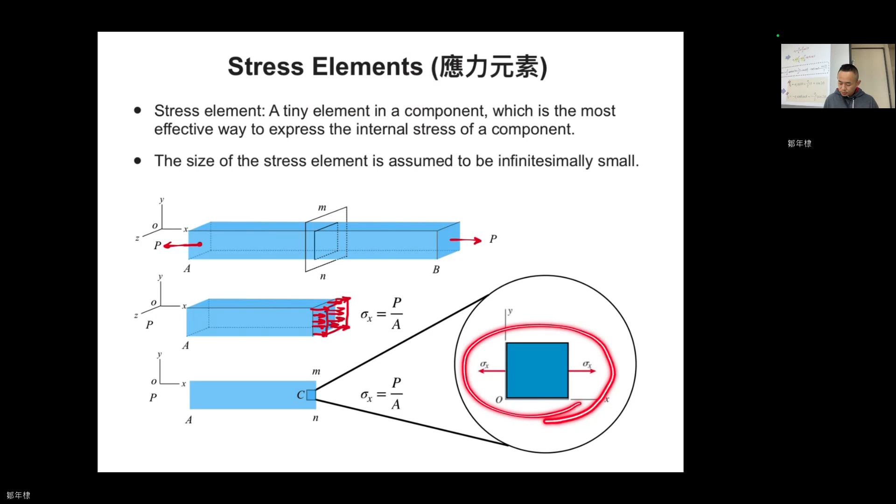Last week we talked about the stress element, which is a really important concept. If you have a loading, your loading will cause the material point in this material to have a stress element. Each material point has a stress, and the material point can be referred to as a stress element, and the element should look like a cube. The reason we use a cube is because the cubic surfaces can be regarded as orientations, and each orientation represents a component of the stress. So at each point, there is one single stress status, but if you choose a different coordinate or orientation of the material, you can see different components of that stress. So if you choose this direction... In this page we introduce how to determine the component of the stress and the relationship between sigma x, sigma theta, and tau theta. The theta is the orientation you choose, and on that surface you may have the normal stress and shear stress.

Also, I would like to emphasize one thing: in mechanics of materials, in this course, 90% of the proofs of problems follow a similar procedure like this. You can use stress times the area to become force, and then if you have force, you can either do force balance or determine the corresponding stress.

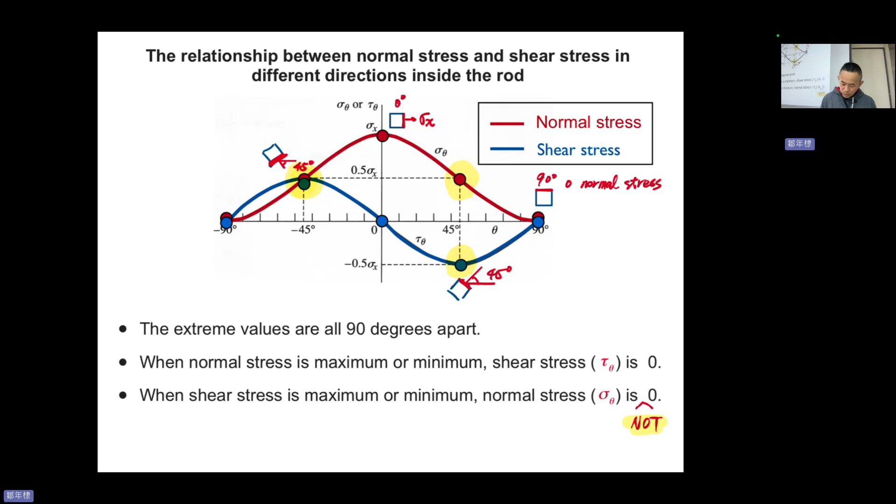Right, if you can accept that, I will give you a first example and then you will understand what I'm talking about. Let's continue. This is kind of typical.

And this is material subject to compression, P equal to 90 kN, area is blah blah blah blah, P equal to 90 kN, and it wants us to find sigma theta, tau theta at theta equal to 25 degrees.

It also asks us to complete the state of stress. What does that mean? Just plot the orientation of the stress element and all the stress on it. The answer should look like the value here and a figure here. So when you write the problem in the quiz, you're going to write down the value and plot the stress element.

Now let's take a look. Firstly, what is sigma x? Because the formula must need sigma x first, right? Sigma x equal to P divided by A, where A is 1.2 times 10 to minus 3, in MKS units. This is really important, please put your emphasis on this. This is 90 times 10 to the 3.

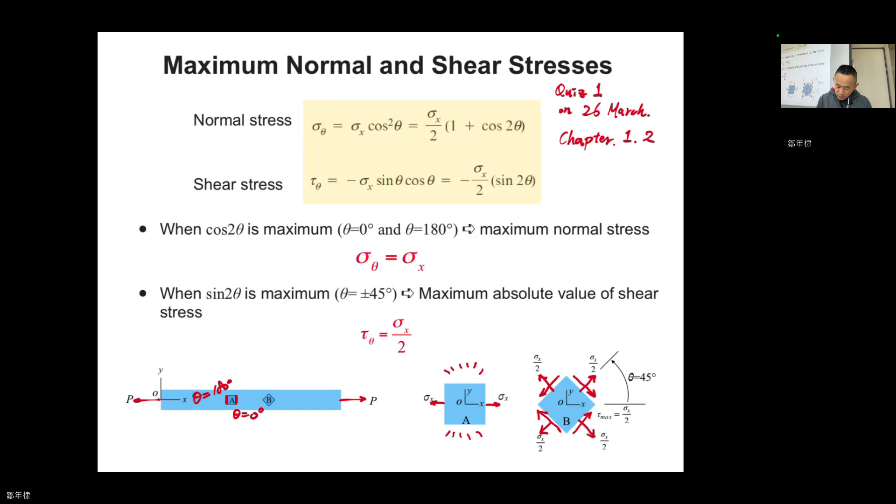However, remember our formula is based on tension, right? Tension is positive - we always assume positive, but now you have compression, so it should be negative. You need to be very, very careful about this. So you get minus 75 MPa, which means your sigma x is actually compression, minus 75 MPa.

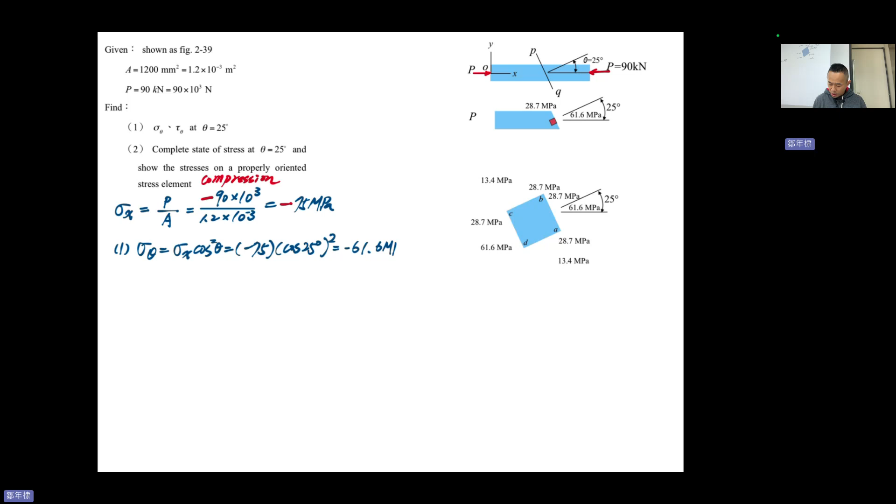So the first one, sigma theta equal to - well this is easy, just substitute all the values into the equation. Minus 75 cosine 25 degrees squared equal to minus 61.6 MPa. So sigma theta, when theta equal to 25 degrees, your component will be minus 61.6 MPa.

And this is tau theta, minus sigma x sine theta cosine theta, minus minus 75 - be careful about this, the minus is there so it will cancel the minus sign in 75. You need to be careful about this. All these values and signs are important when you substitute them. Equal to 28.7 MPa, because it will determine the direction of the stress.

You need to be really careful - as you see, this is minus versus positive. Depending on the sign, the value, the direction of the arrow will be different. All right, so you finished the first one.

How about the second one? Now let's draw the pink part here. Because the pink part is at 25-degree orientation, the problem specified for plane AB only, because this is 25 degrees.

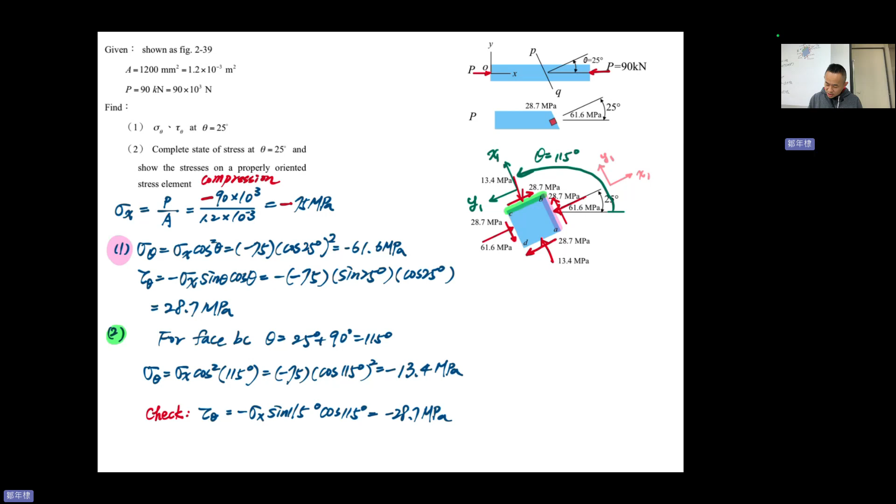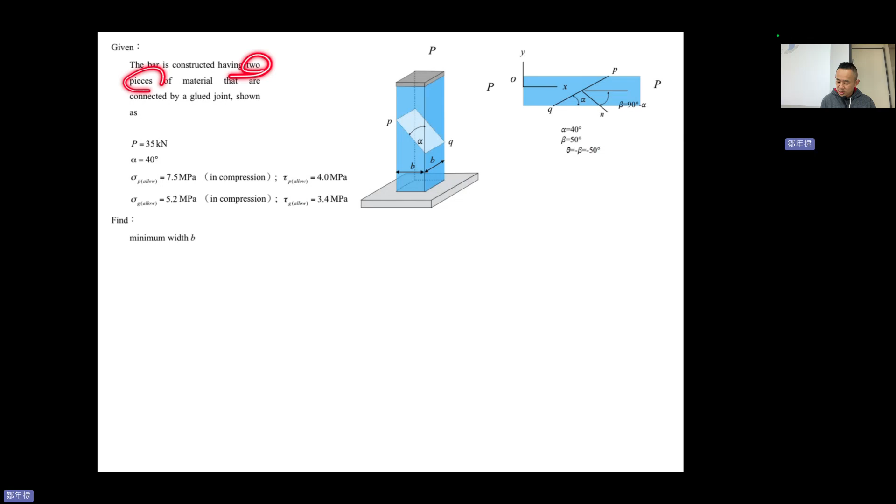Next, this one. Maybe you will think, why do we need to see the different orientation component? Why? Because it will also tell you the weakness of the material. For example, this one - ta-da. This is a bar constructed by two pieces, first piece and second piece.

Combined together by glue - glue joint, glue, attach on it, apply on it, and then put it together. This material is put on the table and subjected to compression P. So you can imagine that if you draw the force P, it should be like this, and you can rotate it 90 degrees to the right, and you can see this figure.

And this orientation becomes here. The P is 35 kN, alpha equal to 40 degrees. So the 40 degrees means that this inclined surface rotated from the x-axis becomes 90 degrees minus 40, so it should be 50.

So you can imagine that this is x1, and this is y1. So this surface has x1 and y1 directions, y1 axis like this.

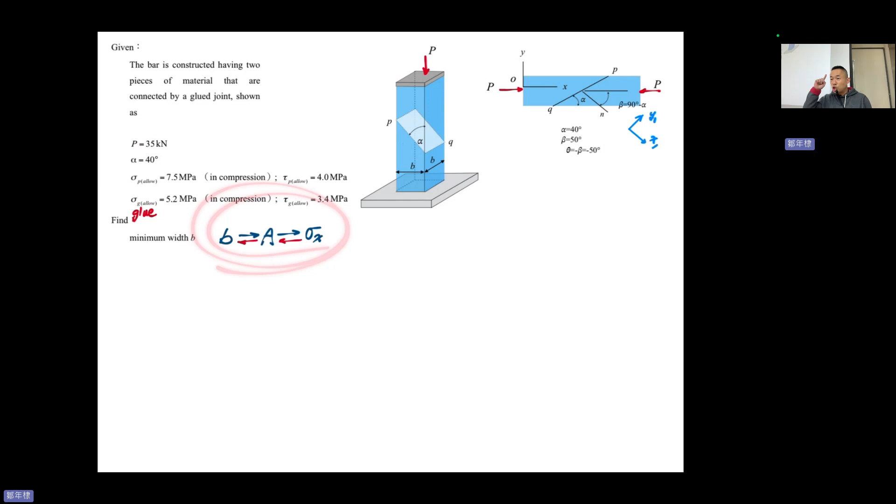So firstly, we want to find sigma X. If we have sigma X, we can obtain B based on this logic flow, right? So let's take a look. First, sigma X for the glue joint.

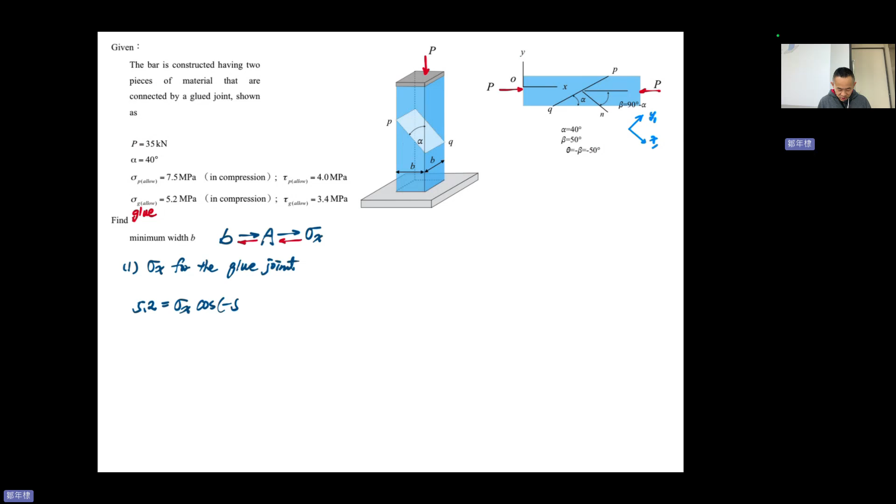Okay, so you see the glue only occurred at the surface P and Q, right? So it's the minus 50 degree one. So 5.2 MPa equal to sigma X cosine minus 50 degree squared. But you need to be really careful about this. Is that correct? Let's take a look.

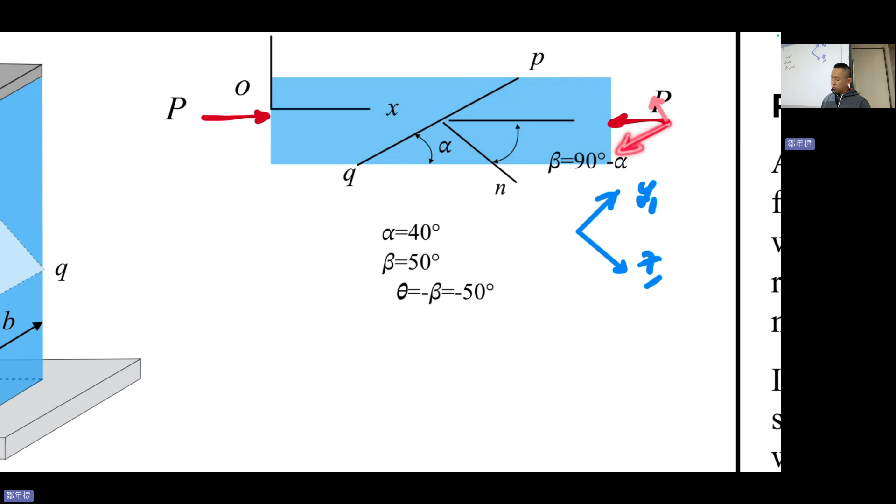If you have a P for compression, you can imagine that the P has a component. So this P for this surface has two components: the component which is normal to PQ or parallel to PQ. So the sigma X you are talking about is in this surface, and this P is going to compress it. So you will see that this is compression, which is minus sign.

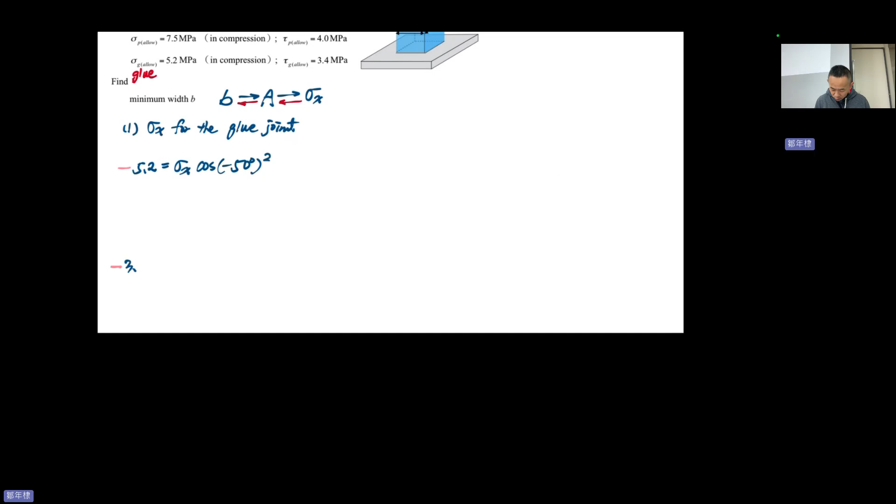So you will have minus sign here. And again, if you have this shear direction parallel to that interface, it belongs on the positive x1 direction surface, but negative y1. So the shear is also minus. Later you will also use minus 3.4, and this is minus 5.2. This is a little bit difficult, you need to pay attention on the direction, otherwise the value you calculate will be wrong - sorry, not the value, the direction. So sigma x equals minus 12.6 MPa.

So your sigma x - don't forget the x is indicated by this x. This x is based on this x, don't forget that. So which means that if you have an overall sigma x greater than minus 12.6 MPa, this surface will encounter

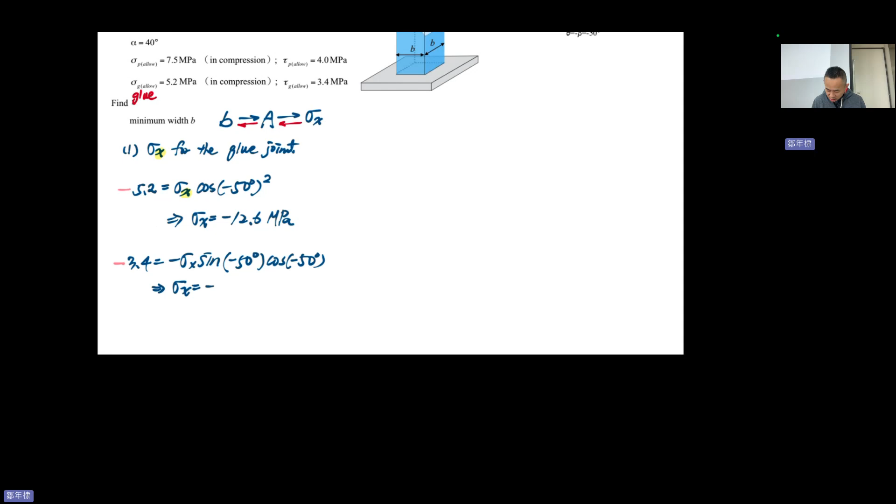compression break. For the next one, minus 3.4, which is minus sigma x sine, substituting into the equation, cosine minus 50 degree equal to minus 6.9 MPa. So which means that if your sigma x is over minus 6.9 as compression, the glue joint will suffer from shear break.

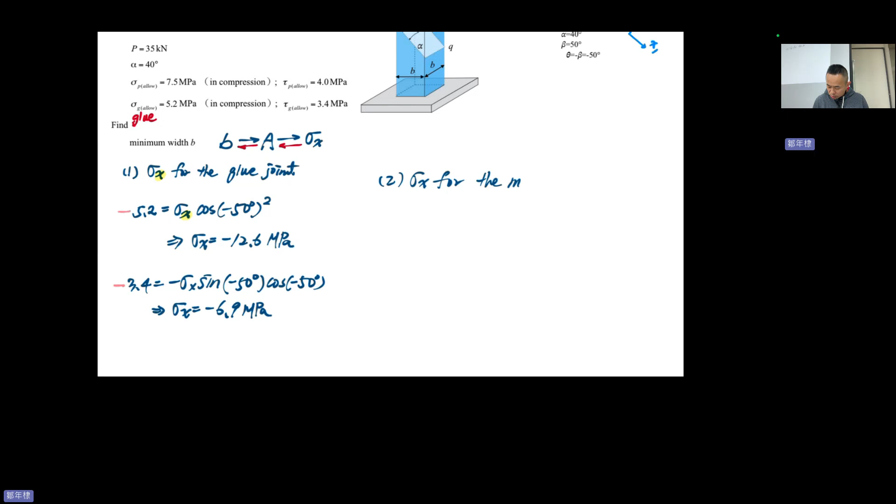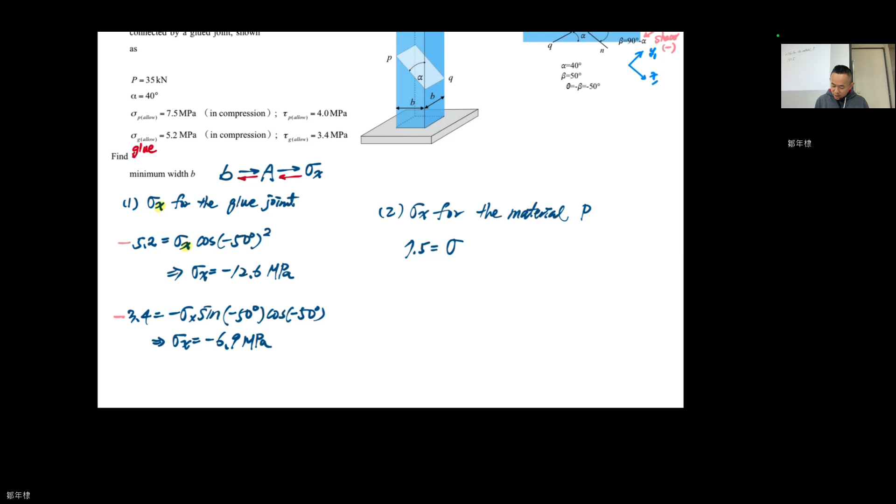Next, for the material - you can say the blue material - it has 7.5 equal to sigma. Oh, this one will be tricky. 7.5 comes from here, and in compression, of course, you will say this is minus 7.5. And, okay, this is a little bit tricky now: sigma x cosine theta.

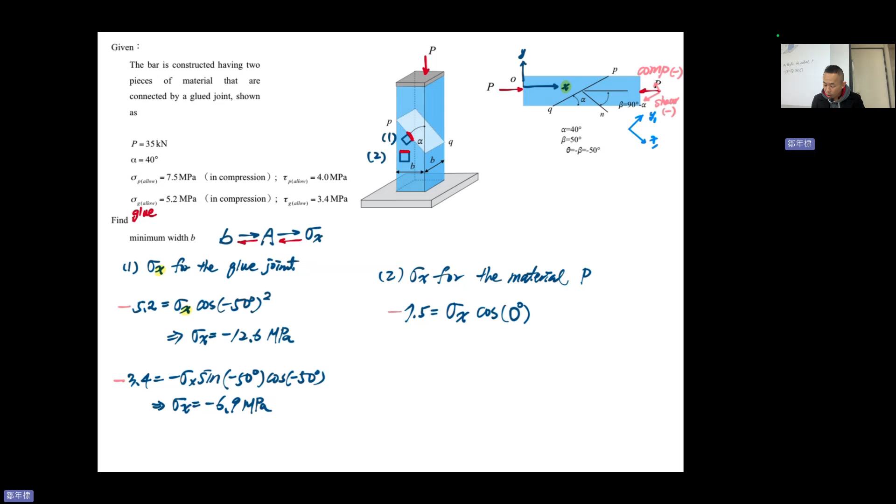And how about problem 2? Problem 2 is the material, so the material has from 0 degree to 360 degree, right? So it has many possibilities of orientation, and you need to find the maximum one, and you cannot exceed the maximum one, otherwise it will break. So problem 2 should be focused on the 0 degree one, because the 0 degree one will give you the maximum normal stress.

So this is normal stress, 0 degree. It will give us sigma x, which cannot exceed or be greater than minus 7.5 MPa. Otherwise, this material will be subjected to a compression failure.

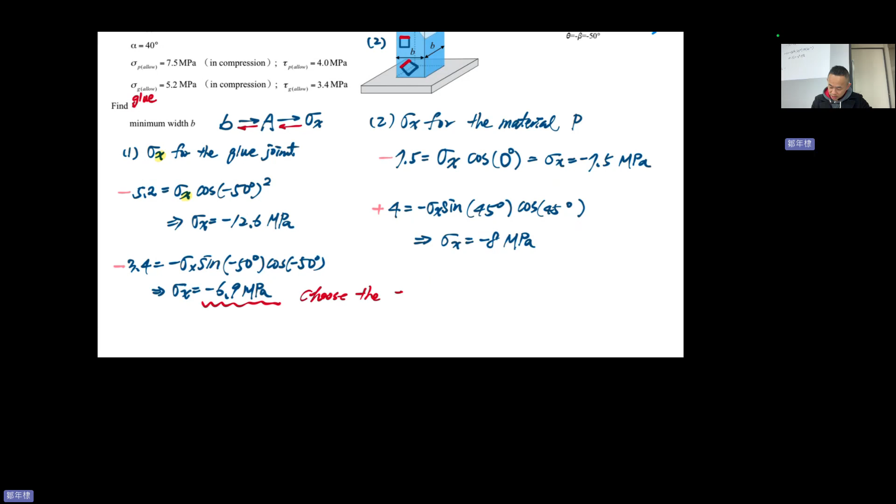Yes, please give me the number. 1116. Okay, good, very nice.

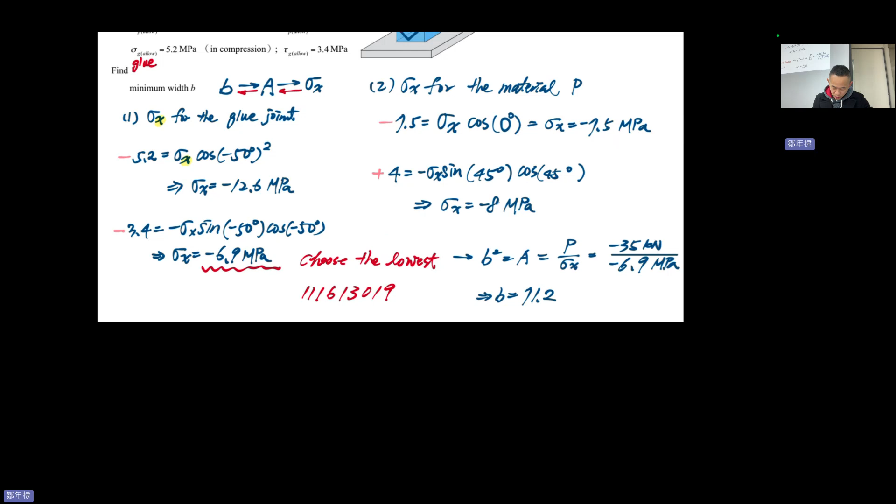So if we choose this one, then B squared equal to A, and A equal to P divided by sigma x, which means -35 kN divided by -6.9 MPa, and B equal to 71.2 millimeters. Okay, so that's the result.

I guess the most difficult part is this one, and the sign. This is a little bit difficult, okay? You need to identify what kind of positive or negative this compression will produce for a particular orientation. This one is only for PQ -50, and this one is for this 45-degree. So you can see minus and minus generate a positive by the same load, but because you focus on a different orientation of surface, you will have entirely different positive and negative.

This is the first difficulty in this problem. The second difficulty is that for the material, since you don't have a particular orientation, you need to consider the failure condition. You need to check the maxima at 0 degree and 45 degree. After you give the correct orientation degree, you will obtain the criteria of the breaking.

Next one. Wow, next one is so difficult. Next problem is so difficult. All your seniors will ask me about this. Previously, on the next page, I didn't include it in the handouts, but because all the seniors asked me how we can solve this, since it's really, really difficult, I decided to include it into the material.

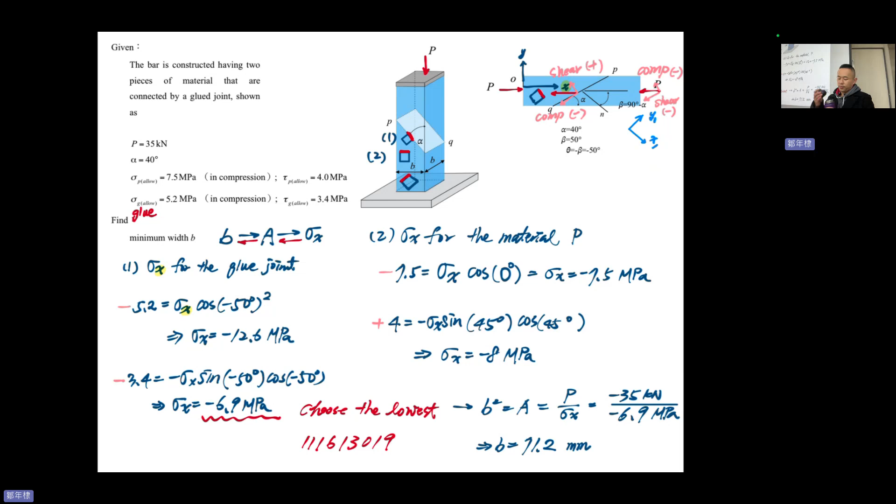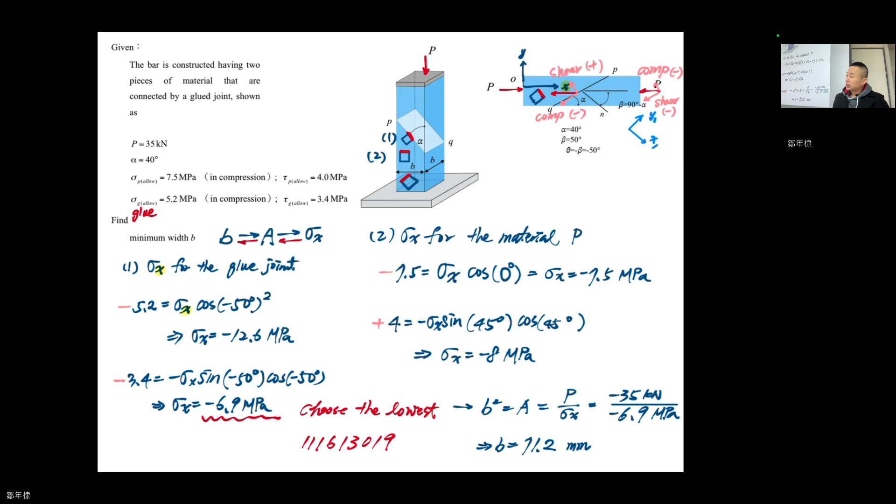Now, next, so difficult, very, very difficult. All right, you can see that this problem is combining the statically indeterminate and thermal effect and the orientation of stress component. So this is kind of a composition of all the stuff in this chapter. Very difficult. And so also it tells us this is a really good problem.

So this problem has material fixed at 2 walls. Clearly, this is statically indeterminate, because you will have 2 reactions, RA and RB. You don't know the value, so this is unknown. RA, RB unknown, but you only have one direction force, and also P is there, so you can see that this is a load in the middle of the bar. So you need to cut it, and this is really difficult.

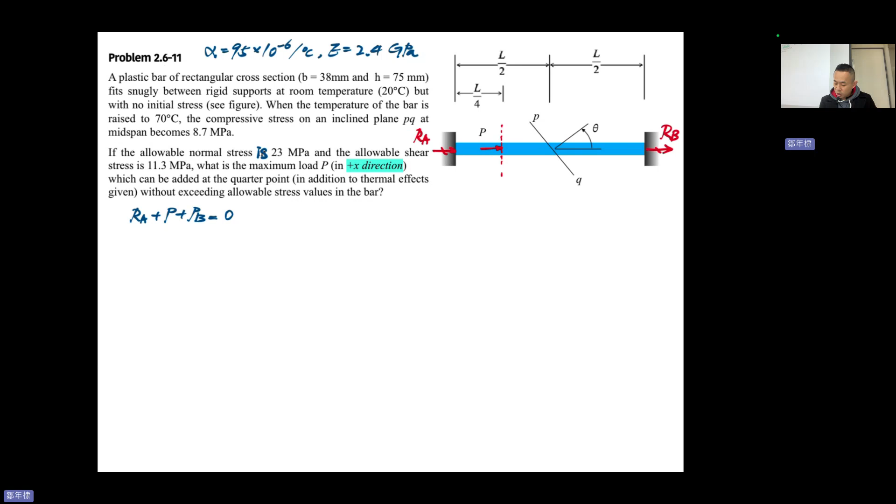Okay, so now, because this is a statically indeterminate problem, the first one is the equilibrium equation. And the next one should be the compatibility equation. Remember that? So what is the compatibility equation in this problem? It must be that the total deformation between these two walls will be 0. So there are two sections. The first one is section 1. You need to obtain delta 1 and delta 2, and also the increment of the thermal effect, and sum them up together to become 0, because they are all defined within the walls.

So what is delta 1? If I want to know delta 1, we need to know the internal force in section 1. So how can I get the internal force? All I need to do is cut it. We cut it, and this is for delta 1. If we have the normal force in this section, we know delta 1 because PL divided by EA. So N1, and this is RA, if we choose to put the left-hand side.

Next one, if I want to know section 2's deformation, displacement, what should I cut? I can cut here. Wow, beautiful. And we choose to leave the left-hand side. RA is still there, N1 is not here, but we have P here, and of course N2. We assume N2 and N1 are all in the positive direction. So this is delta 2.

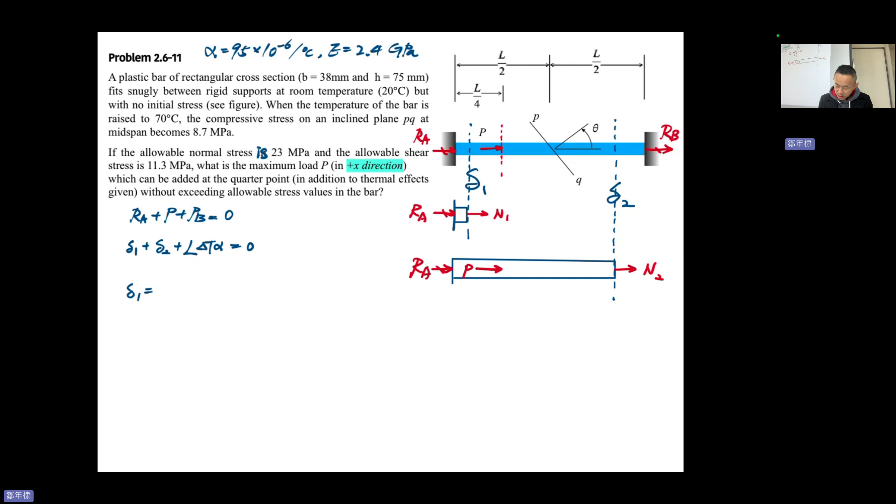So again, compatibility equation: delta 1 plus delta 2 plus thermal elongation, delta T times alpha, times its original length L, will be the delta for the thermal effect equal to 0. So the first one is the equilibrium equation, the second one is the compatibility equation. And then, again, you know that delta 1 equals what? Which is the P here, the P is the N1, right? So what is N1? Let's take a look. N1 must be equal to minus RA. Minus RA. Okay, how about N2?

N2 equal to minus RA minus P. So now you know the value of N1 and N2. Delta 1 will be PL divided by EA. P, what is P? Which is N1. N1 equal to minus RA, so minus RA, times L divided by EA. L, what is L? The L is, here is the first section, quarter of length, this length, quarter L. Divide by EA, no problem, easy.

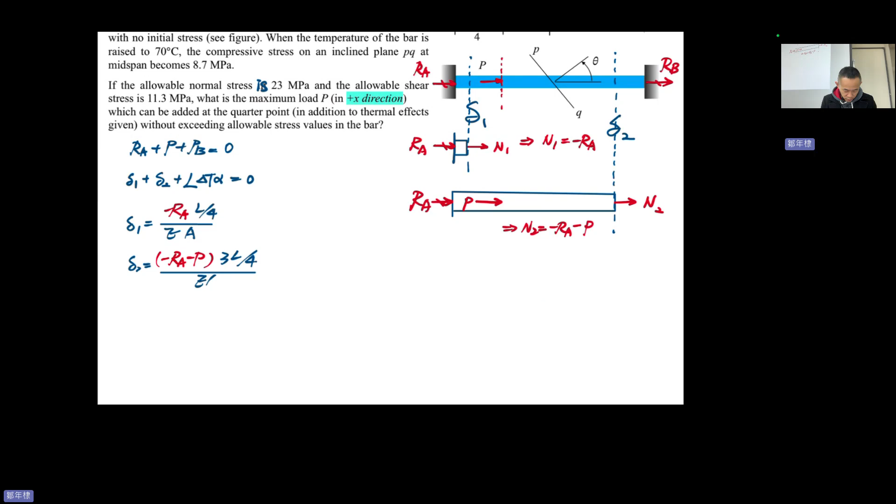How about delta 2? Delta 2 is N2. N2 is minus RA minus P, okay? And how long will it be? 3 over 4L, 3L over 4, sorry, and EA of course. So delta 1 and delta 2, I have written it down here.

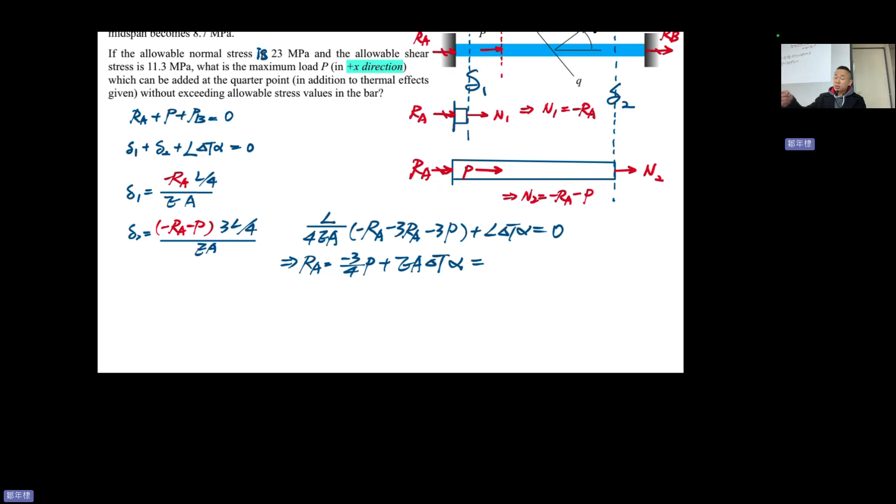So if I just substitute all the values we obtained here, we can have minus 3 over 4P plus... 32.49 kN, all right. That's, you see, this is starting to make a relationship between RA and P and values. That's good, so RA, we know that. And okay, I don't know, should I try to save some space.

Saving some space, okay, now let's take a further look. One, the first section, all right, the first section, you can substitute your N1 plus RA equal to, N1 equal to minus RA, right?

Equal to minus RA, so easy, N1 equal to 3 over 4 P minus EA delta T alpha. All right, I start from here. So you just give it a minus sign, so positive minus. So your N1 equal to this one, and if you divide by the area, you can get the stress. Sigma x equal to 3P over 4A minus E delta T alpha.

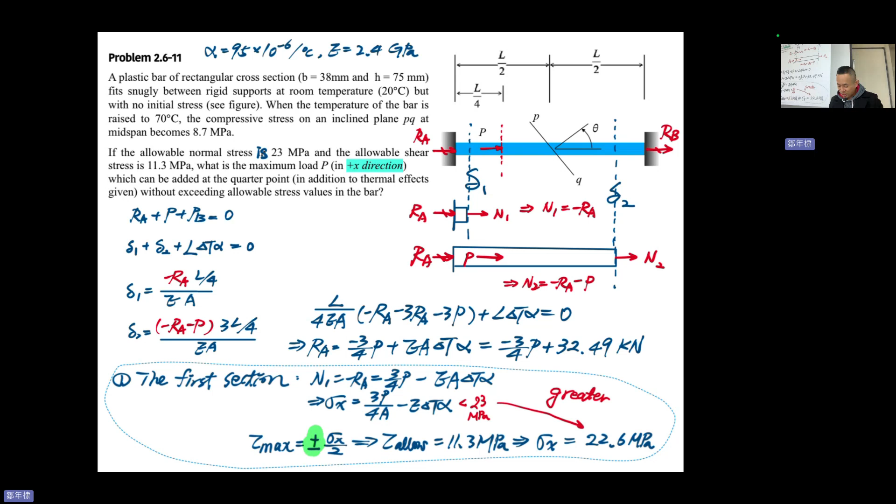This is really difficult, this is a really difficult problem. So let's continue.

So the first section, and delete it, delete it, delete it, okay, and move to here, and move to here.

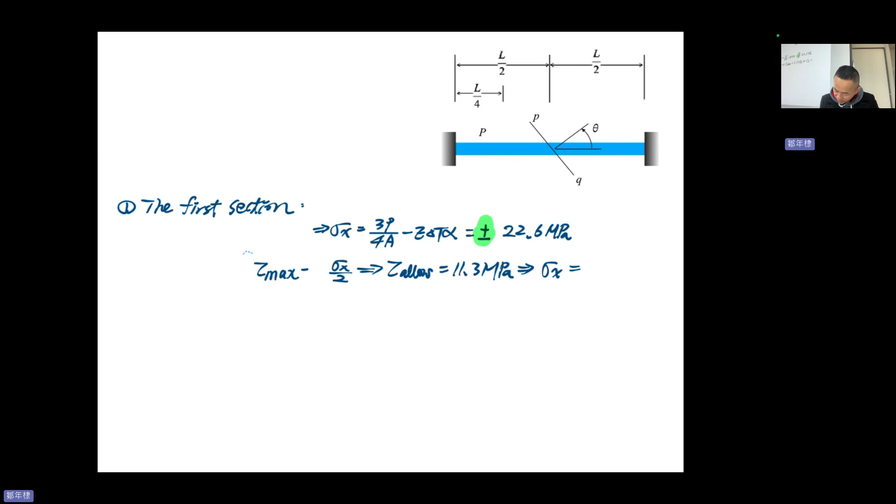Okay, so the information actually comes straight from the previous note. You see how I continue these notes. At the first section, sigma x equals this, definitely, because this is always true, right? But the value should be less than or equal to 23, because it must be either 22.6 positive or negative. It will cause a break of section 1.

Okay, so if this is sigma x, this is P here, sorry, P here. Okay, so you can see that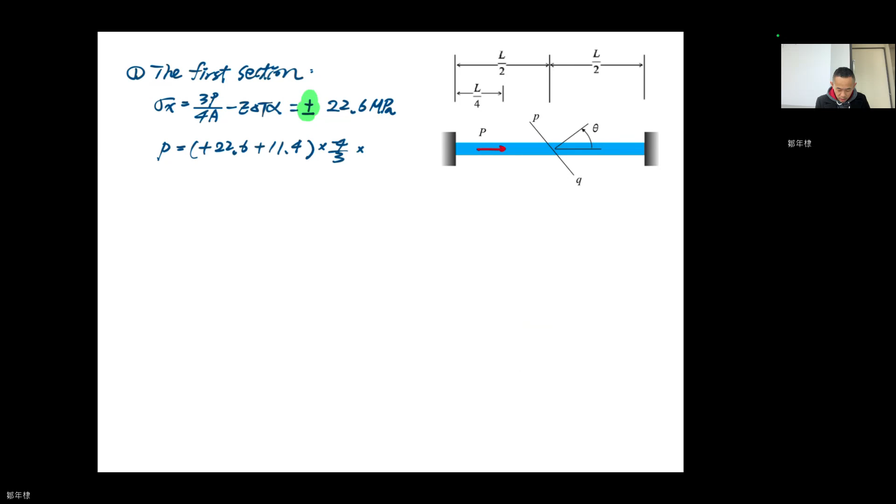my sigma x can obtain P positive 22.6 plus 11.4 times 4/3 times 0.00285. Oh, it's too big.

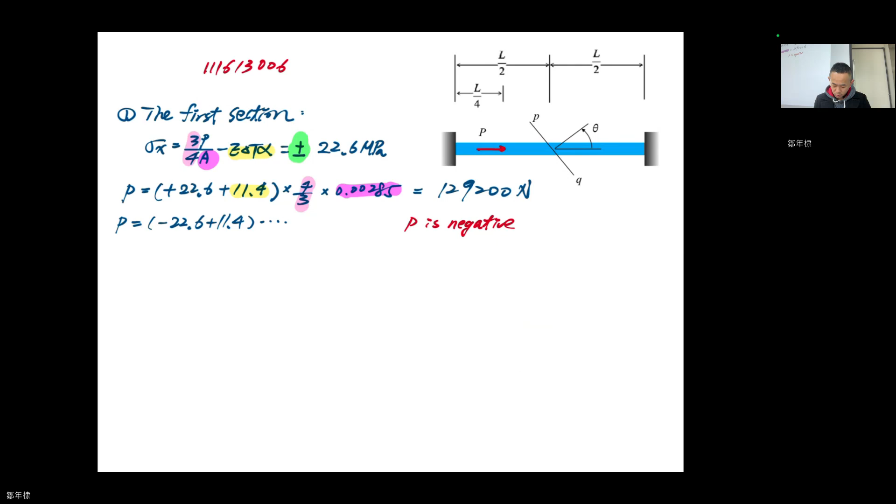All right, so it is not correct, it does not match with the description in the problem, because the problem said it's positive x and now you calculate P is negative, which means that your direction assumed is incorrect.

No, it's not, okay. So the first section and the second section will do exactly the same thing. Okay, the second section, I will do a similar thing.

N2 plus P plus RA equals 0, and N2 equals minus P, equals divided by 4 minus E A delta T alpha. So sigma x equals minus P over 4A minus E delta T alpha.